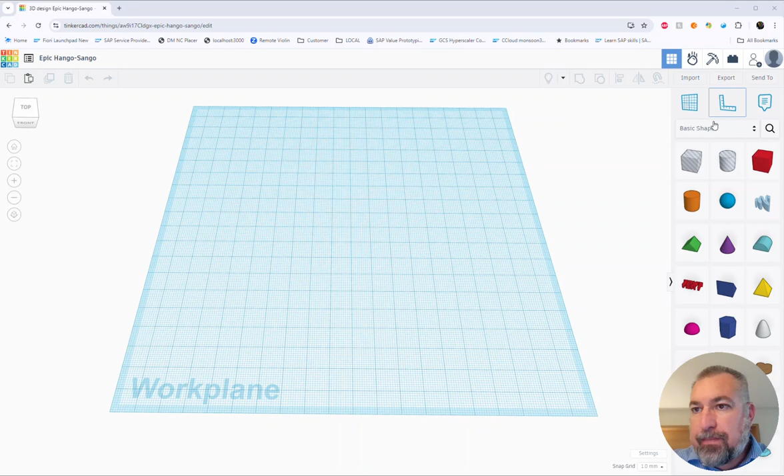When you're putting together your design, keep an eye on the size. You really don't want it to be more than about 50 millimeters big, just to keep it decent sized. If you end up making it a little bit too big, before you save it out, just try to scale that down and get it back in the 50 range.

Then a couple of things to make this make a little bit more sense. To get this in the format that I'd like, it's either an STL file or a 3MF.

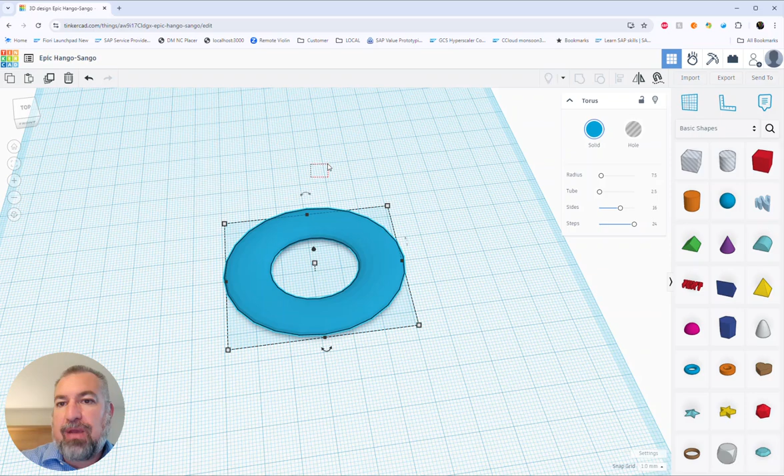An STL file can be made from Tinkercad by just going to Export and then saying STL, and that just downloads the file.

Now you'll notice it says Epic Hango Sango, lovely name, and that's because of this name right here. Tinkercad makes a random name for files. So one option is to name your file—you could call this assignment1 or whatever you want to call it.

And that way, when you download that now, it'll be called that. So now you can see that one's called assignment1.stl. And then that's a file you can upload to Canvas.

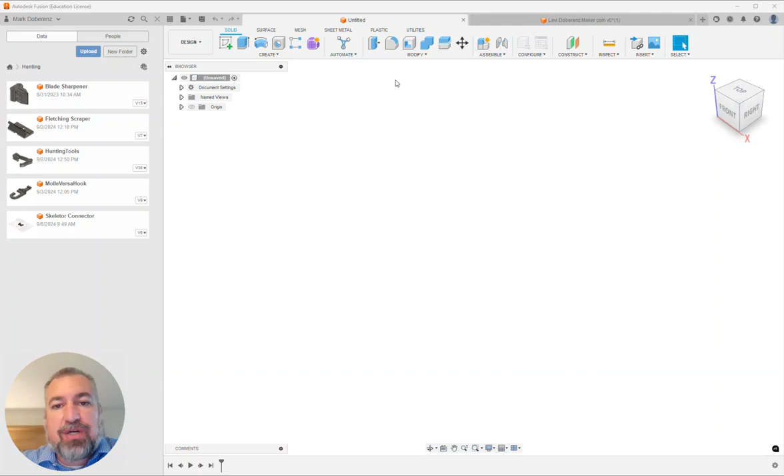So one other thing is if you're wanting to try using Fusion, I'm going to create a quick sketch, and I'm just going to put a circle in here and a couple of lines.

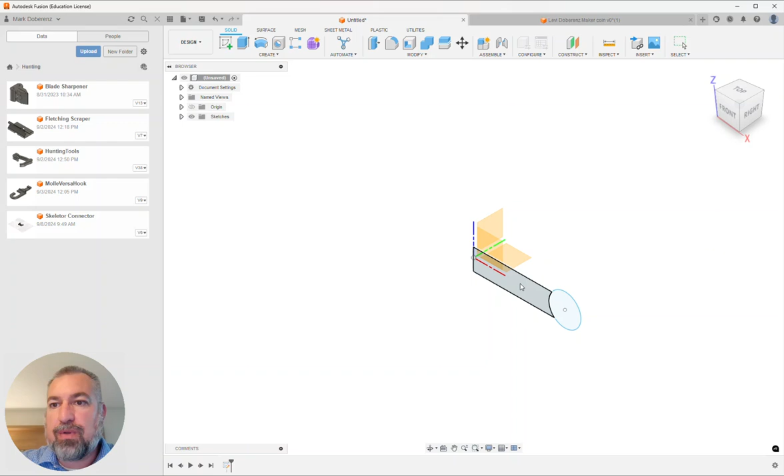And back over here, finish the sketch, and then we will—wrong key—create a revolve, and I'm going to select these two around this axis, and now we've got, okay.

So the tricky part about Fusion is really knowing what size something is. You can select this and go to the inspect, and you can see here maybe that the outer loop—yeah, it really doesn't tell you much about how big this is.

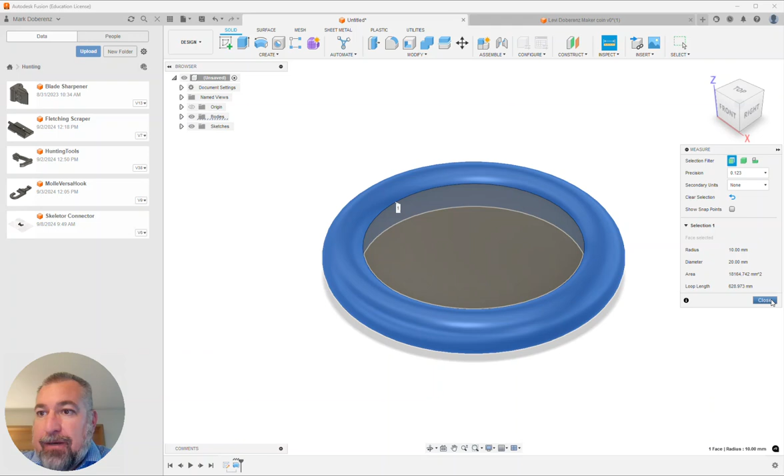You can dimension it. We can go back into the sketch, and I could say D for dimension and go to here and at least know that that radius then is 57 millimeters. So that's going to make the disc, or the coin, 114 millimeters, which is far bigger than you want.

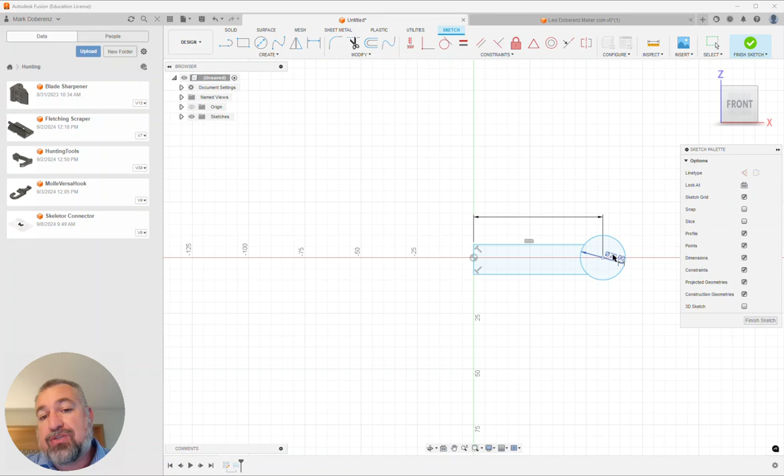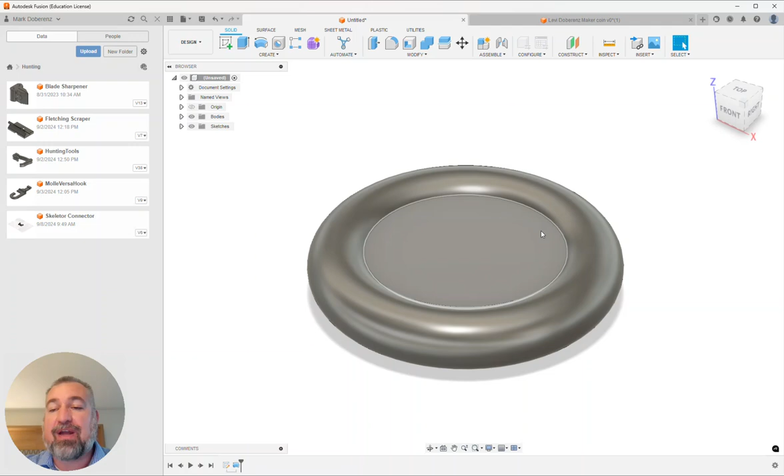So I'm going to make that point and that point coincident. And so now when we hit finish, now we've got a much smaller coin and something to do with. Now, if we had that bigger one, so we'll just finish that.

To get this into an STL file or a 3MF, we can come up here to File, and then 3D Print. I find this to be the easiest way to do it. You can do Export, but I like the 3D Print option, and I'm going to set this to either STL or 3MF, so we can already get that 3MF file if we want.

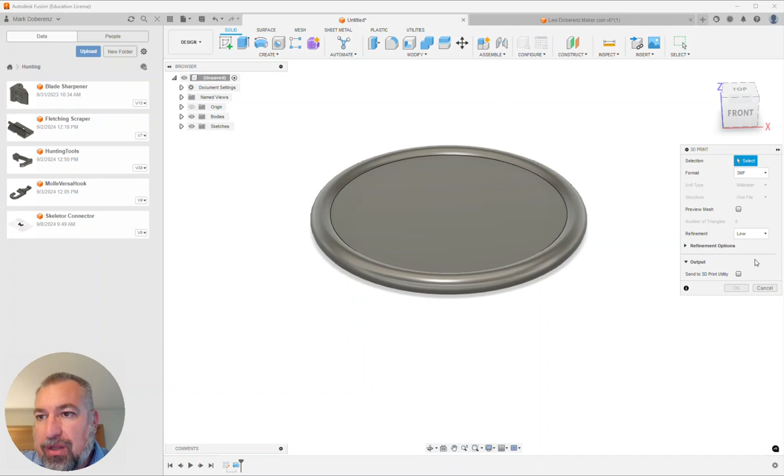Refinement, I tend to leave this high. If you put it low and turn on Preview Mesh, you can see that it's not very triangulated. Whereas if we turn that up to high, because we have a lot more triangles, that's going to create a smoother file.

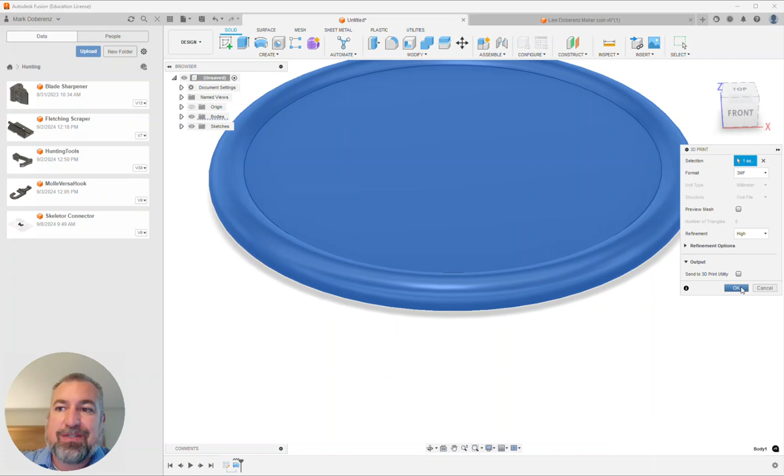So I tend to leave it on high. And you have to turn off this Send to 3D Print utility, otherwise you won't get an OK button. So we'll hit OK, pick a place where you want to put it, and I'll call it MD Test.

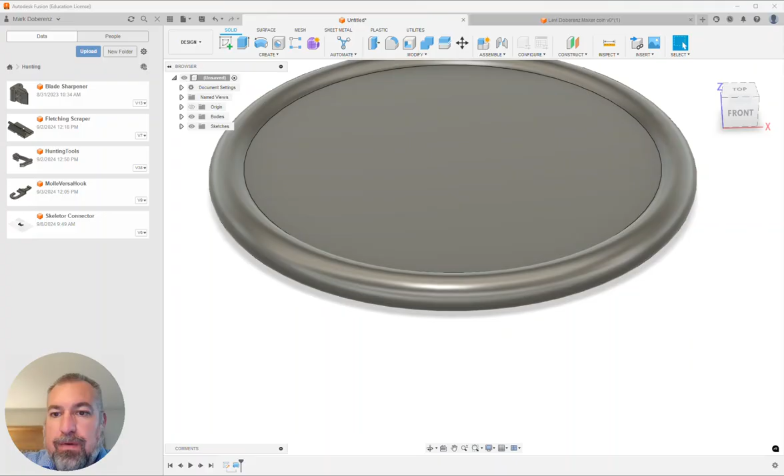But now it might be too big. So now what we can do is we can actually import this, and we'll choose a file. Where did I put it? Downloads. Oh, I shouldn't have made that a 3MF. All right, so let's select that again.

3D print, and here we'll change this to STL and hit OK again. MD test. Save that. All right, so now I've got an MD test, and now I want to import that mdtest.stl file, and it's set to millimeters, so we'll import it.

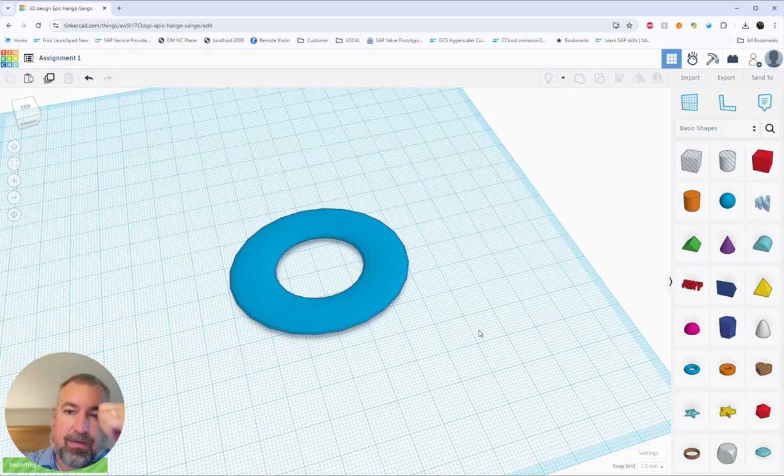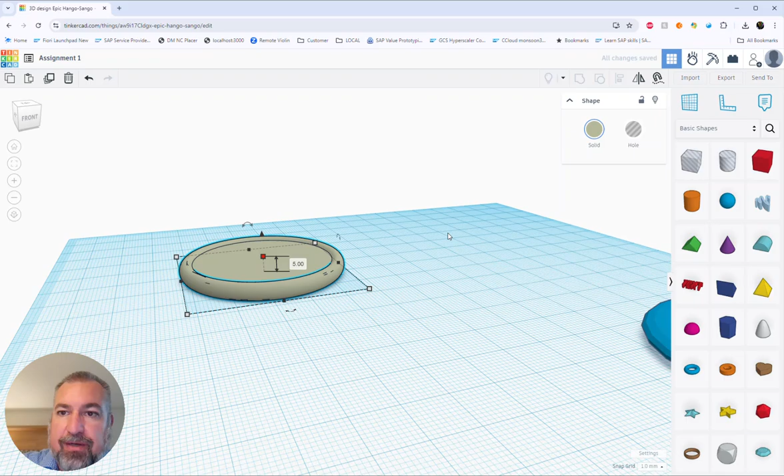Okay, and there is the file, or that maker coin. Now that's way too big, so if I select this, I can see how big it is. We can just scale that down. And you'd want to scale down the vertical axis also to something that kind of looks right. And now you've got a maker coin that's within the size that you want.

And that's 5 millimeters, so that should be fine. And then you can take this one and export that again as an STL. And now you would have your STL file. So that's another way to kind of get it to the right size. I know that can be a little bit confusing sometimes.

Yeah, so hopefully that helps in getting it to the right size, but then also in getting the STL or 3MF. You can go straight to 3MF if you're doing Fusion, but Tinkercad is easier to do the

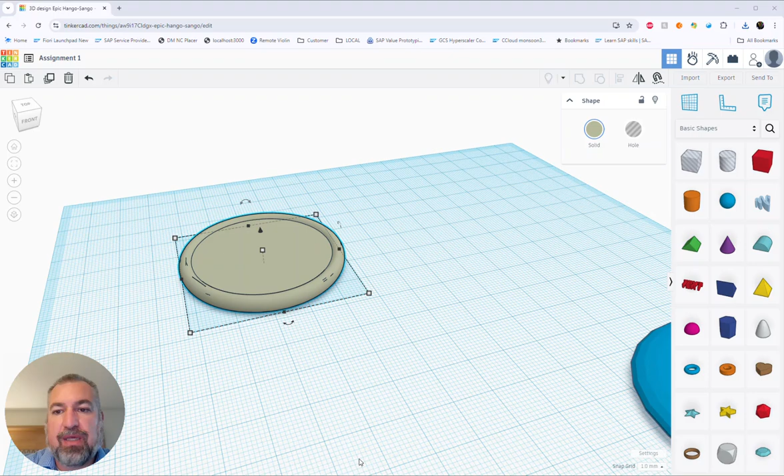STL file. All right, now one thing I wanted to show too is if you used a slicer to get the 3MF file, if you really wanted to. Again, this isn't really needed right now. But if I put that MD test into here, now you can see what its dimensions are, and we can

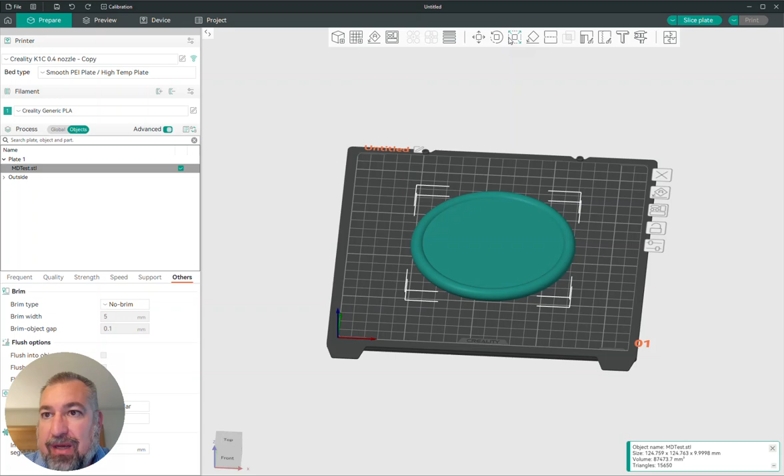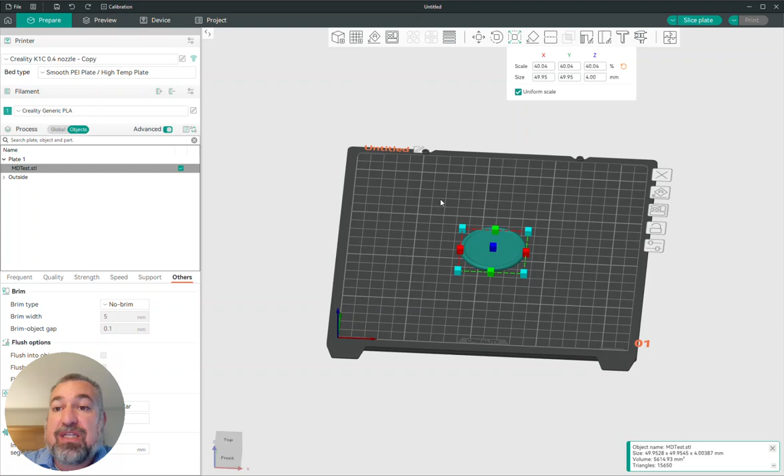actually scale it down here where it'll scale it proportionally, which is really nice. So now if I scale this down, I can kind of see in that readout that it's about 50%. I can see where it's 61 millimeters, so that's still a little big. So I can just kind of keep going down. So now we're at about 50 millimeters, so that should be fine. So the slicer is a good way to scale stuff down too.

And then if you wanted to, you could go to File and then Save Project As. And here you could say, I want to save this as a 3MF. And so this is a way to get that 3MF file. And if we replace that one, all right, takes a second.

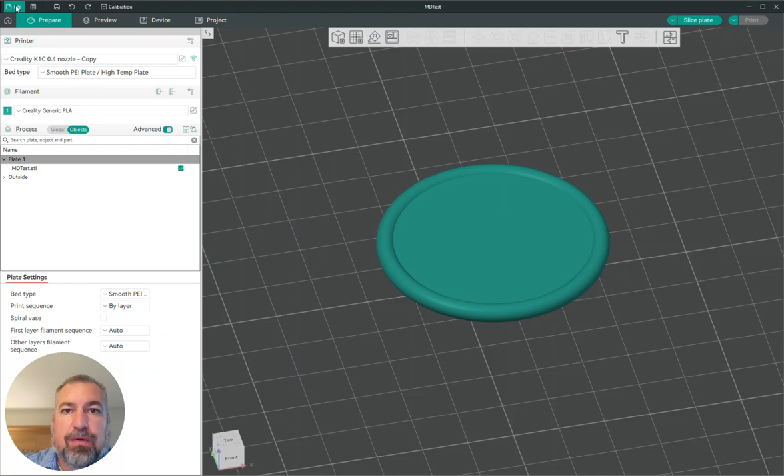All right, so now if we do new project, so now it's blank, and if we open that MD test that we just saved, and now we can see that it's still scaled the same size that we want. It's right under 50 millimeters. So the slicer is kind of a helpful way to get the file the right size, and then you would just upload this 3MF file and you're done. So that's a way to use the slicer.

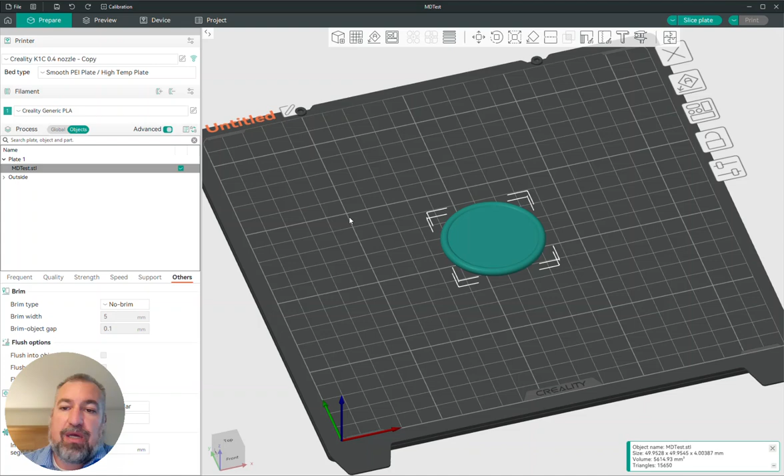Now we will get into, and I'll make another video here in a minute about some of the gotchas that I see in some of the files, just so you guys can start to learn some of the things to keep an eye on. Okay, hope this was helpful.